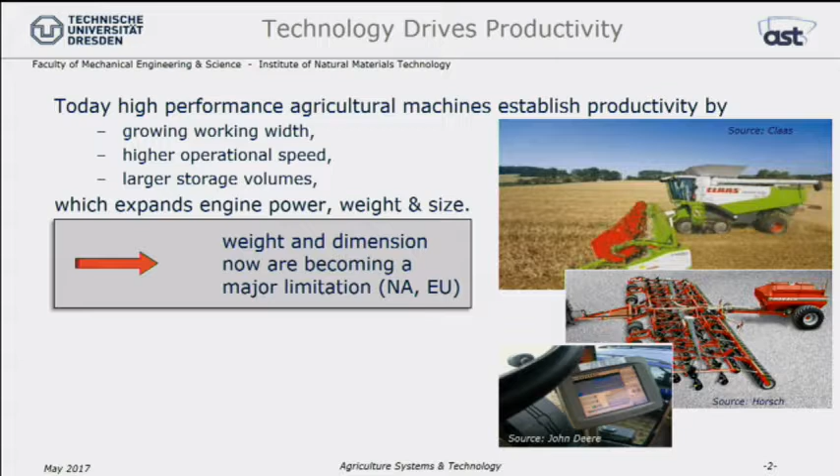So we're doing much more compaction in the soil than damage to the road because of the machines. However, because we cannot measure soil compaction today, and we cannot measure the impact of yield reduction due to that soil pressure, we don't have a quantitative number for it. We only have qualitative numbers. So that will be part of the future for sure. But given that, the concepts are limited; weight and dimensions are at the end.

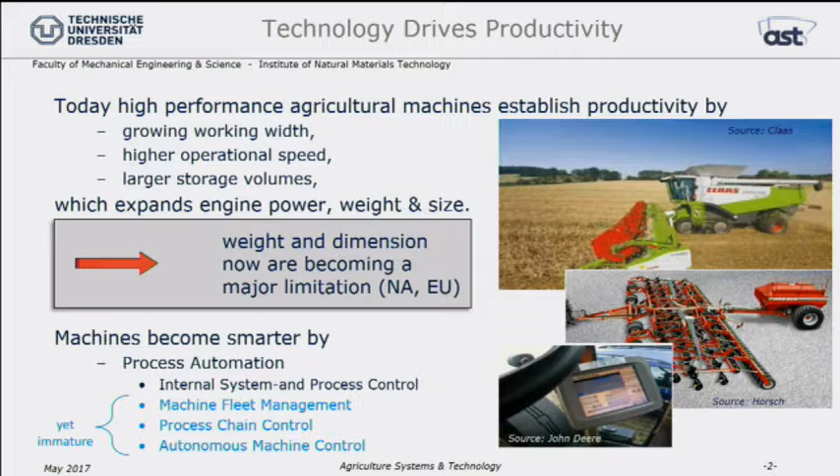Therefore, we have that major trend of automation in those machines, because automation means high utilization of installed capacity. So we don't have to grow the size of the machine in the original manner, because we increase productivity by automation procedures. Now the question is, how do we cope with the problem of those dimensions? And there are different ways to approach that.

The first thing would be increased process density. So in the same envelope, doing more processing, which means more power, which also means different functional components. And if we cannot increase process density enough, then to increase the machine size we have to reduce the machine weight by lightweight design. We do the lightweight design with steel and higher strength materials. That's already the business today.

What we really foresee in the future, 10 years from now, is fiber composites. If we need to stay in the same concept, fiber composites need to come, because we cannot increase the weight of the machines anymore, but we have to increase productivity. So that's one thing. Automation is the second thing, but automation only carries for a while. If we get closer to the 90% level of technical capacity, then automation is at its end anyway.

And then there's also a lot of thinking, and I will show you some ideas of that, about disruptive conceptual changes, so say we do machines totally differently in the future. We go away from that growth rule of working width and installed engine capacity. We do different concepts in the future, and this would also lead to autonomous machines. So these are the things we are facing today, and certainly power generation in that process is a big question.

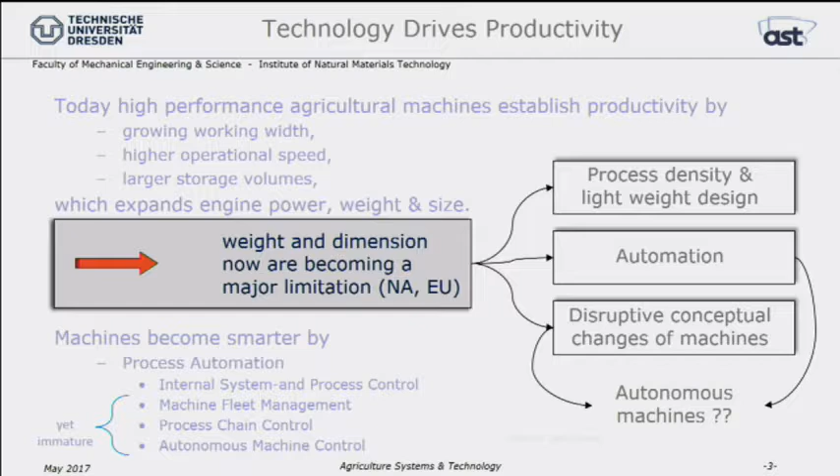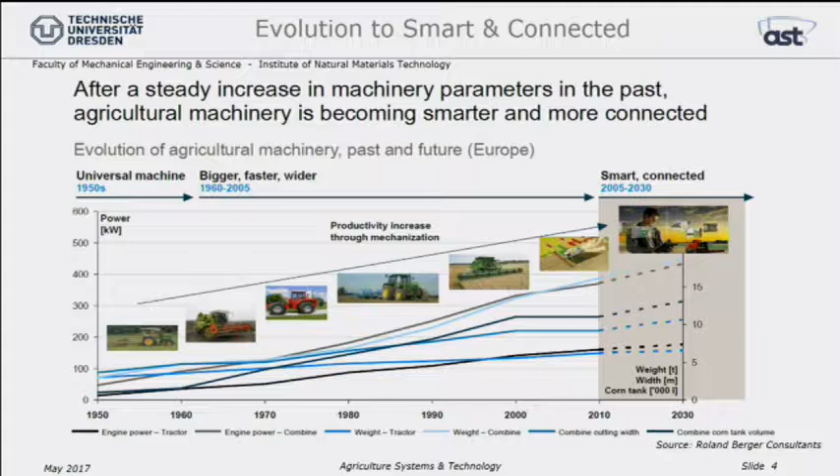Just looking at the history a little bit, how history has been developing, you see this change from increasing productivity by coming from muscle power to engine power. Then we had the tractor-pulled implements, and if productivity needed to grow, the implement became a self-propelled equipment. So not having the universal tractor providing traction and auxiliary power, and the operator station for the process, but getting the whole process embedded in one specific machine.

And like he was saying, you're talking about 250, 300, 400 hours a year for such a specific machine. So a combine harvester has usage hours of less than 400 hours a year. In Europe, we have 20 days for harvest. This is what we have a machine for, and it needs to pay back within those 20 days. So high range productivity within one machine, and it works at the moment. But we are concept limited, as I explained. So here the big question is, what do we do in the future?

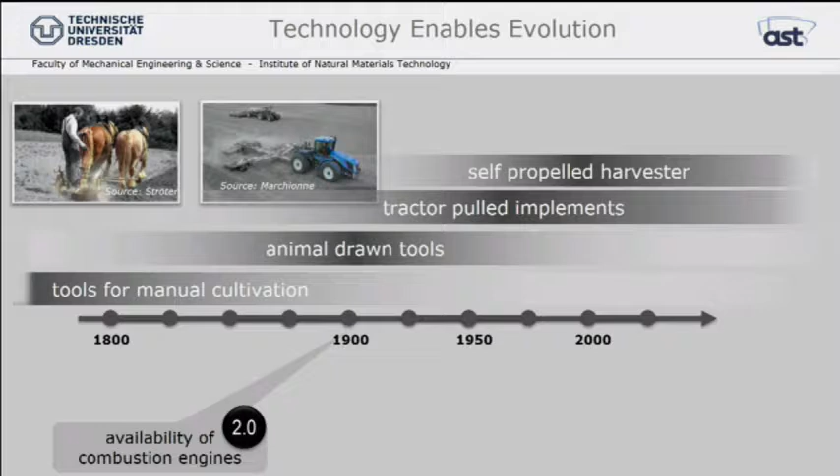Just talking about revolutions, we had this revolution 2.0 with the introduction of the engine. Then we had the third revolution, with the introduction of chemical fertilizers and plant protection. And today we are really at this industry 4.0, cyber-physical systems. We are seeing very much the same thing. We are talking about farm 4.0, transforming to digital farming in the future. This is just starting now, certainly at a very high speed, because all those digitization technologies are on a very fast development path.

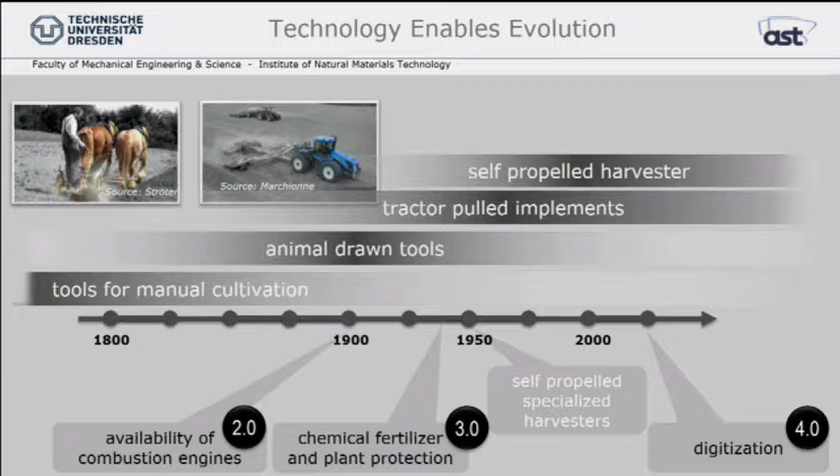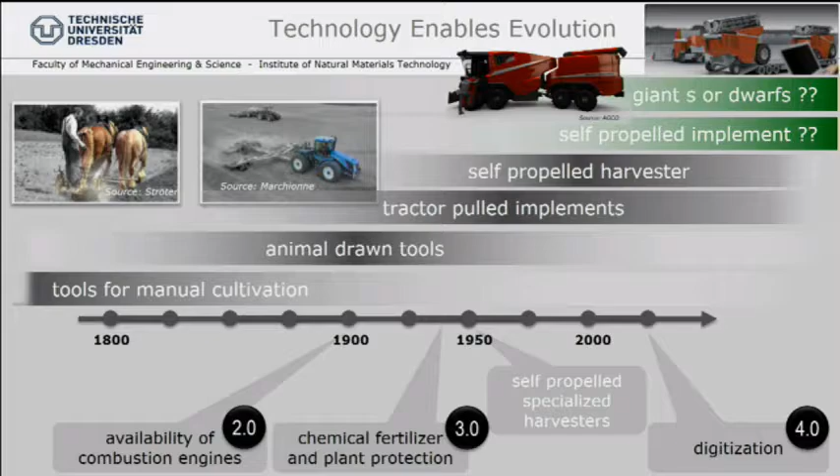And this digitalization leads us to automation not only at a machine level, but at the farm level. And the big question for the future is, how is that historical development to self-propelled machines carrying forward? Do we really increase machine size even more and find solutions for it? From the engineering point of view, that is possible. Engineers always find solutions. But does it really make sense? Are these the most economically viable concepts? There's a lot of doubt that they would be. It would be just the standard incremental improvement of machines coming to those giants, and there is already a growing number of people believing we will change that drastically, going to those swarms of dwarfs, of smaller machines, still increasing productivity.

A word on digital technologies. As in other areas of industry, this is also true for agricultural business. This will change agricultural production processes in an unprecedented way. However, if we don't do it right, it's not a given. It doesn't come by itself. It's very complex, it's very global, and there are lots of traps on the way to fail in that process for many reasons. So I would say it could change if we are doing it right. Otherwise we will stay the old way and would see many problems and other scandals if we are not doing the right thing.

Just to mention a few of those technologies, 5G, that's the most important one. Actually, here at Dresden we have the 5G lab of Germany, which is, at least in Europe, the leading research center not based in industry. We're working very closely together with them. It's just amazing what they provide in technology, and it carries you to a way of thinking about what we will do completely differently in the future.

Then we have that whole list of other digitalization technologies, which will be implemented in those machines in the future, and so we have all those building blocks to change our concepts and to go from single machine development to a machine, or even process thinking, process automation. So that's just coming, and there's a lot of work going on, and that's all interdisciplinary work. So life is getting more complex, it's getting harder.

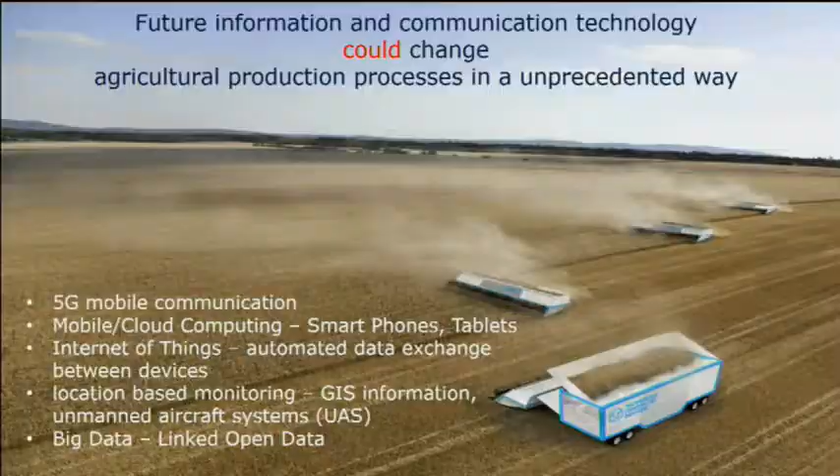However, if we can approach that the right way, then it also is becoming much better for everybody. Talking about connectivity, here are the areas where we think connectivity gets implemented. First of all, that makes sense, robotics and automation.

So we have totally different ways to communicate between the process components. Not even saying machines, but communicating between the process components. We can carry that at the farm operation level.

Also, if we're talking about automation, the development of sensors is a very important thing, because sensors will deliver the feedback of the process, will deliver the current status of conditions, and will also deliver us in the development phase the knowledge that we need in order to control our processes.

And that may be going down even to the bioengineering part, where all the seeds that are used at the farm operation level are not only selected in a brochure and a catalog, but by more knowledge-based systems accomplishing all the different impacts in the farm operation and selecting the best possible seed in order to grow at the farm. So again, lots of opportunities out here to improve.

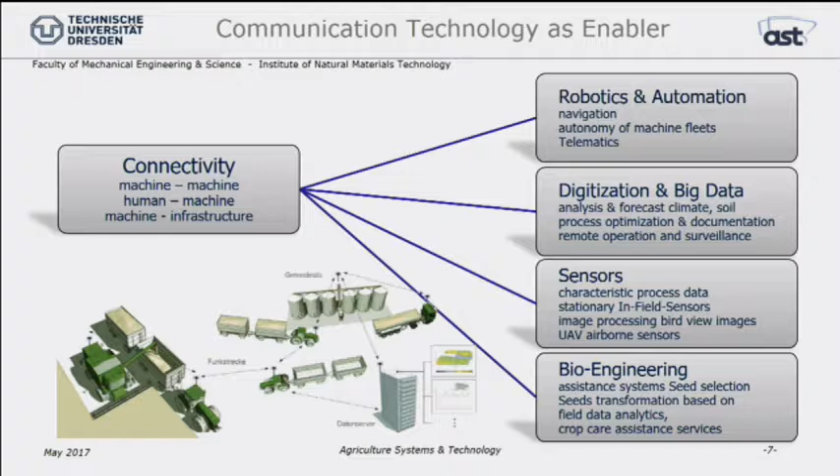Now I'm coming more to the engineering part. For the engineering part, and it's true for every mobile working machine, construction, agriculture, or other areas, productivity, performance, quality, cost of ownership, that is what drives us forward. And whenever we come up with the next level of that machine system, we have been increasing one of those, or even better, all of these parameters for the customer.

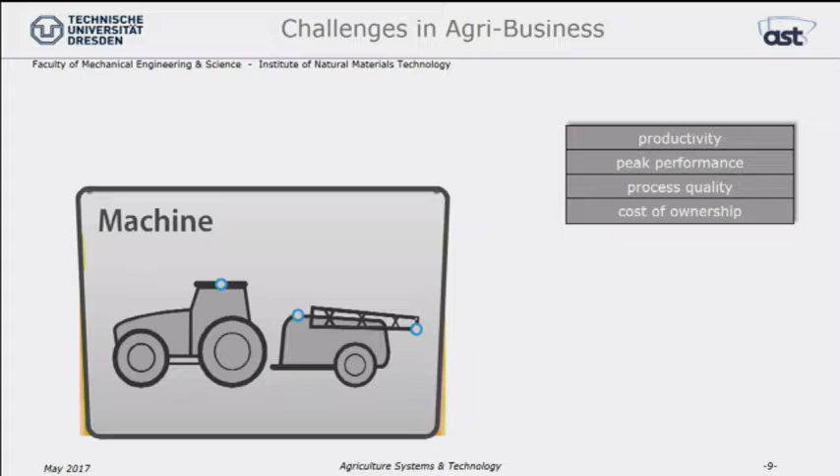So we are thinking in that system of tractor and implement, or that self-propelled machine. But this is not enough anymore, because now we already understand that there's a process that was before my system, and there's a process following my system in that plant production cycle. So the production system of a farm is producing biomass, producing plants, and we have all those different machines and equipment along that process that's usually somewhere around 180, 200 days in the year.

So we have a system, and since we have all the technology building blocks and the sensors, lots of knowledge and a lot of information and data, we try to utilize the data of one step and deliver it to the next step in order to optimize the next step of operation as well. So things are getting more complex with that connectivity, lots more potential, but also more complexity.

However, this is still not enough by far, because then really the big thing is coming at us, and you recognize that on CO2 reduction, you recognize that on emission control. We are seeing the same thing in order to really be sustainable and resource responsible, and not decreasing biodiversity even more compared to the level which is not sufficient today already.

We have our machine system that's in that shell of the ecosystem, and all around we have that information level that is capable to connect every unit to every possible information. This really makes development quite complicated, because still the question stays, how do I position myself with new ideas that are still economically viable?

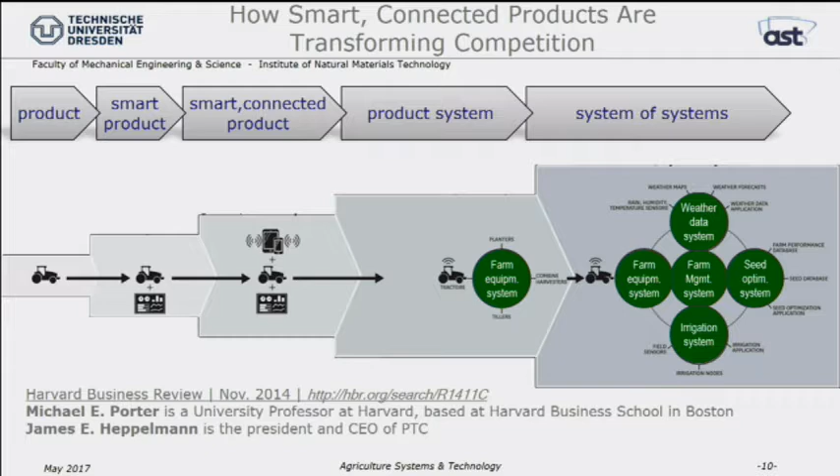Western Europe has technology leadership in the agriculture business because of the stronger competition in the market. It's a technology-driven market, and that certainly results in new technology, new innovation being put on the market first in Western Europe. North America follows shortly behind, and it's not because of their capabilities. They have the same capabilities or better.

It's just because of the market demand. They can afford to lag a little bit behind Western Europe. Then Eastern Europe is very diverse. They run the best technology down to 30, 40, 50 year old technology. That really depends on how the business is built. Is it a larger structure? Is it a smaller structure? Is it family owned? So they are broadband. And Asia is usually behind in technology by about 20, 30, 40 years.

And that, again, throws up a very important question. I was showing you the historical development of the equipment. Is Asia, for example, following the same path? At the moment they do: they grow their tractors, they grow their engine sizes, they grow their working widths. But since now we are basically at the limit of our concepts and think about new concepts,

there's a certain and very interesting possibility that Asia is not following the whole path through to those big machines as we have them today, but switching over to the new concepts much earlier, just skipping those large self-propelled equipments. Because if we get down to smaller units, then they fit the structure of these farms much better. It's impossible on a 40 by 40 meter field to put in a combine which has a 12 meter working width. That's just totally impossible.

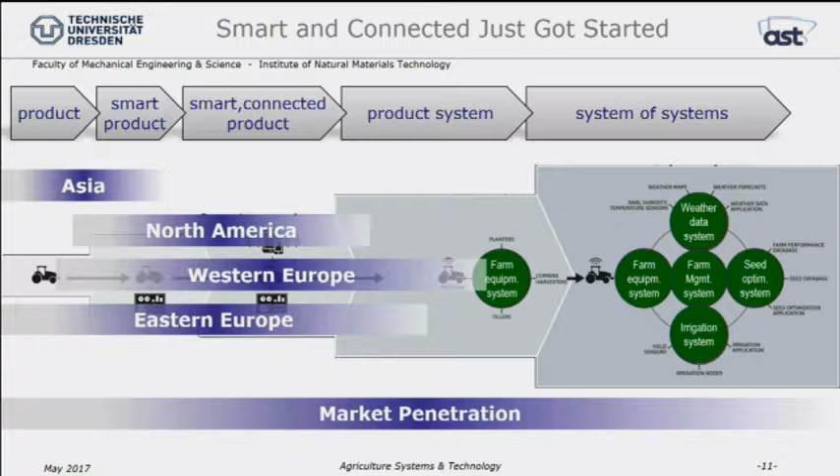So coming back to smaller units, that's interesting. They don't even follow the whole path. And with that modular thinking, it could also be scalable automation level, scalable drive technology. So also come up with a cost level that is achievable for those markets.

Okay, now talking about potential for CO2 reduction, and that's what this summit here is about. Everything is about CO2 reduction, emission reduction. How do things get more efficient? How much fuel can we save with certain things? We're facing the very same thing here. But if you're looking, where's our potential in fuel reduction? Again, as I said, we have that process with us.

And if you're looking at the cars and on-road business, they are somewhere around here in the upper level. And this is, for our potential, only 10%. Because at the machine functional level, so how is my process being done, and the process automation level, there's another 20 to 30% potential just to work more efficiently, which means we're saving fuel, we're reducing CO2 emission. But really the highest potential is on the farm operation level.

Farm operation is done today more or less in a manual way, and the communication device for that is a cell phone. So there is no automation at the farm operation level. Communication is really done manually. There are no databases, there are no SAP systems today that are carrying all the production data and allowing this knowledge to be standardized and put back into algorithms. That's a starting thing. They're called farm management systems, but this will come in the future.

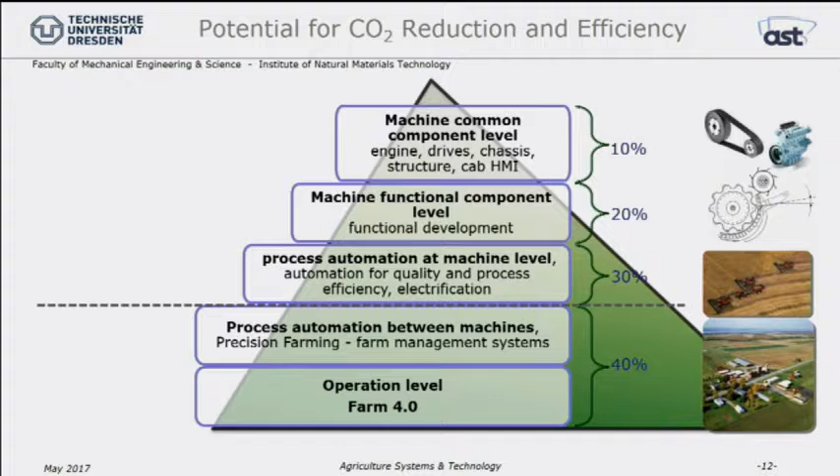And everybody is expecting from those farm management systems, that automate and assist the operation at the farm level with all that new technology, that there's a potential saving of input resources. And this is something where we really can fit together the economically viable solutions with the environmentally helpful solutions in that range.

But the big problem here is, today we are thinking in machines and evaluating machine performance. Coming down to that farm operation level would mean that we have to do an assessment of the production process in total. So not just one machine, one implement, or two machines. The whole growth period from seeding to harvesting would need an assessment in order to balance between the inputs and the outputs and the machine technology that's used. We don't do that today.

And this is not the way that machines are sold today. So it would be a great cultural change, not only for marketing in the markets, but also for the R&D departments, because now the development would take place outside the machine, not inside the machine.

And on the other hand, if we really try to assess our processes by creating some load cycle systems, because of the high diversity of processes and markets, it's basically impossible to simulate all that representatively in certain load cycles, which is done today in the truck and car business. They just have the load cycles, and the drivetrain is run against that load cycle and assessed according to its emissions and values.

If we are doing that, we are only at the upper 10% reduction potential, because then the rest of the world, the rest of the important world, is just put into one certain load cycle, which is always wrong and never true. But if that exists, and that's the big danger in regulation.

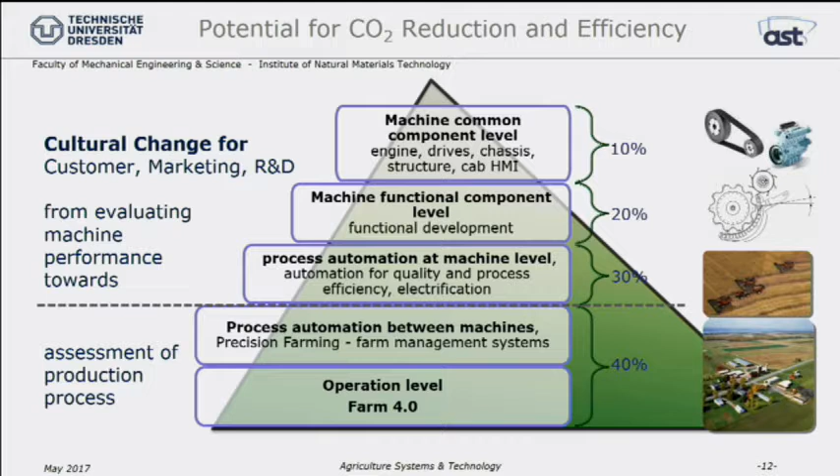One approach that is taken is that Ecotech project. I had a slide, but it's hidden at the moment. Ecotech project means there's an assessment of the production process, and that's all put into a simulation tool. And with that assessment and that simulation tool, it is supposed to be possible that the current status of CO2 footprint for a farm can be assessed, and then based on that current footprint, any activities in the future to reduce this footprint can be shown as well.

And the VDMA is driving that, and the industry is driving that approach, and it's a group of industries and a group of research units that are driving that project forward. And the whole intent is to come to a self-assessment of the industry and to documentation of how much CO2 reduction can be done by changing the processes in order to avoid that regulation part.

Because that way it could be shown that the whole agriculture business is capable to reduce emissions and can document how much has been done, just at a much higher level of complexity. So that's at the moment the way we think we can approach that CO2 reduction problem.

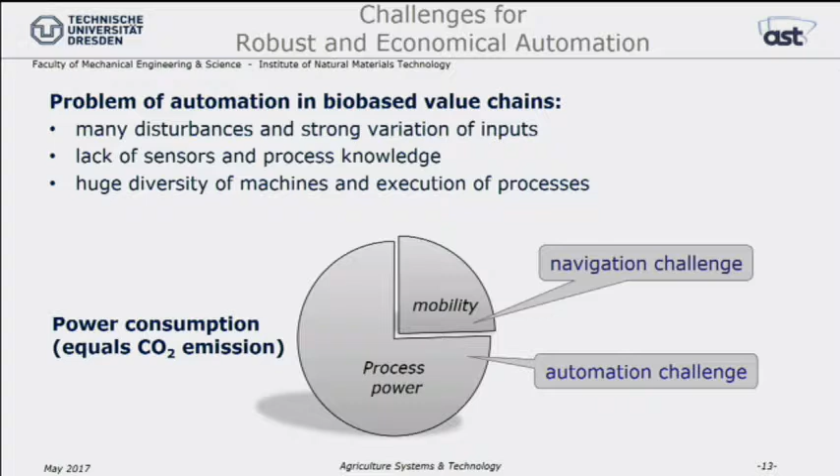So back to what the future will bring to us with the step to cyber-physical systems. The cyber-physical system is nothing else than a physical system connected to the outside world with those technology means. We are still facing the same automation task as we do today, but what's coming on top of that is that security and safety problem.

We didn't have that before, as long as the communication was inside the machine, which is currently in most of the cases true. If we're going outside of the machine with communication, we will have to face those security and safety problems. And it's not the machine manufacturers that have the competence to do that, it's the providers of digital technologies that have to provide us that.

But talking about 5G mobile communication, safety, security, reliability, latency, that's all built into these systems in a completely different manner than we had it before. So it's not comparable to our cell phone mobile communication of today.

That's one side, and on the other side, with changing concepts, changing machines, being in a new environment, and a mega trend in the world to healthy food, to food with less meat, that all impacts the business a lot. So there are lots of ideas how to come up with new business models of regional food providing, which will impact the farm operation, which then will impact the requirements for those machines.

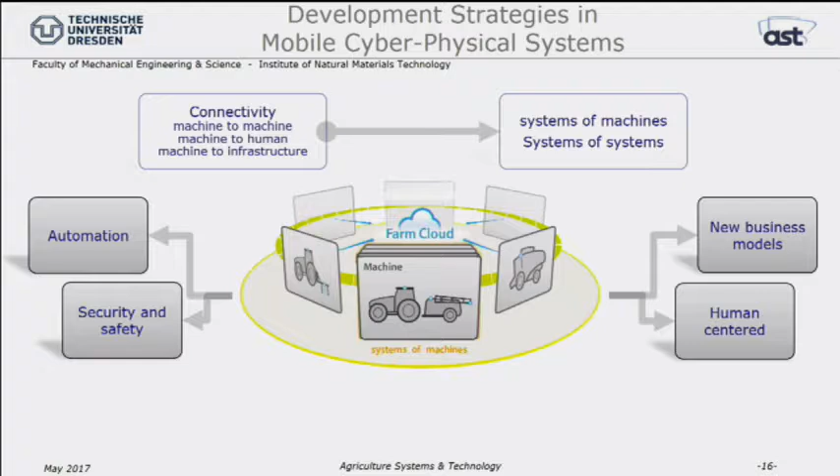So that is a very important point, because this will decide: if we run down that 100% automation path and it turns out to be economically not viable, we have a problem because we don't get back as easily.

And looking at the building blocks for future machines, looking at that automation level, this is from Berger Consulting. They put together all those technology blocks that already exist. First, there are a lot of technology blocks that we need in order to come to automated systems. This is high complexity, but on the other side, they exist.

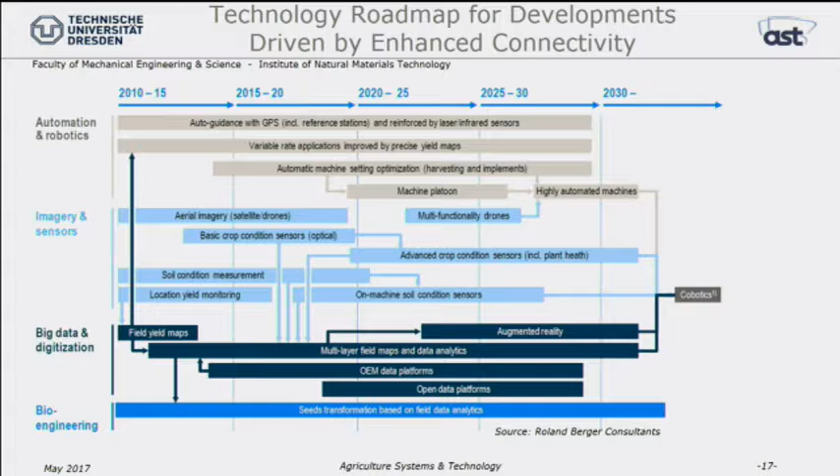And Berger Consulting is saying our ultimate final target is not robotics, but cobotics. And cobotics is defined as collaboration of humans and machines. That's what I just explained. We consider the operator a part of our control system and not a disturbance. And so these humans can collaborate with the machine system. Again, from the point of automation, it's not so complicated.

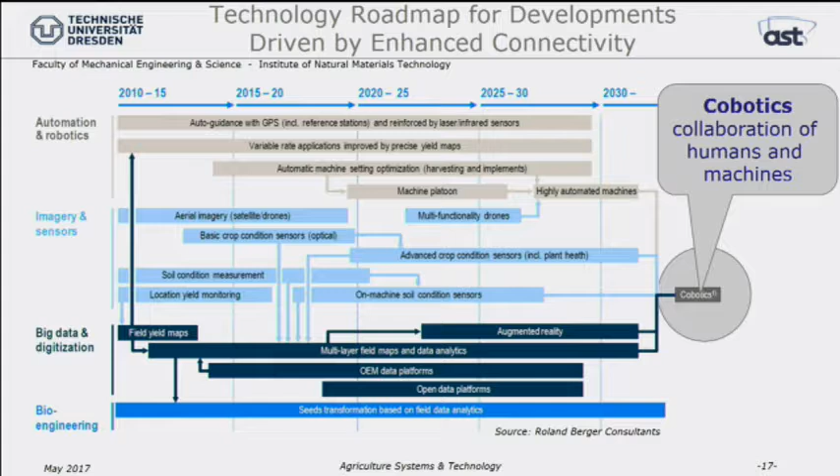It's just a different approach we have to take. And specifically in the mobile working machines business, with all those diverse processes and diverse markets, it really makes a lot of sense to have that human intelligence built into the system and make use of it and even make it scalable. That's what this picture is showing here.

So there are different levels of how to automate. I wouldn't go into the detail if you don't have questions to it. The point is here on the right-hand side, between manual operation and full automation, we make that scalable with those collaborative systems. So it's not one certain level of automation we deliver with the machine. This level of automation is configurable per situation and per operator. So that's a totally different thinking in automation.

However, methods, tools, simulations, knowledge, which is based on that, that's the same as today. It's just we put the human operator as another variable into the system and make use of it. And as it's a variable, it can be a very competent operator, can be an incompetent operator. We can slide this automation level up and down and utilize the system the best way without getting stuck at those conditions where 100% automation for some reason doesn't work and then causes machine downtime. So that's the idea.